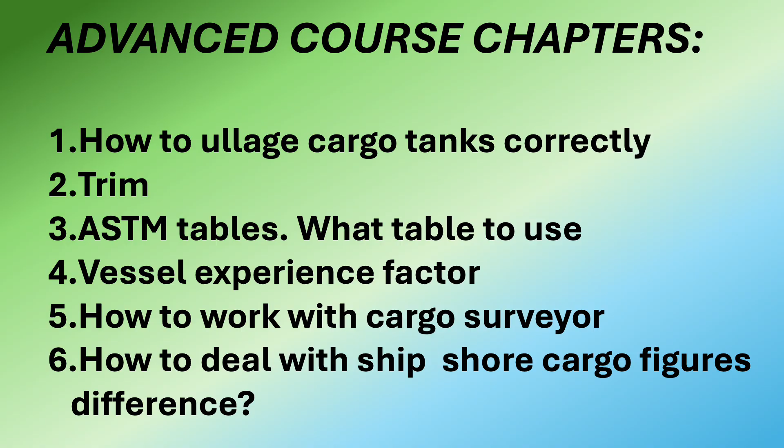Advanced Course Chapters. How to ullage cargo tanks correctly. Trim, ASTM tables, what table to use. Vessel experience factor. How to work with cargo surveyor. How to deal with ship-shore cargo figures difference. Chapter 1. How to ullage tanks correctly.

Before you go on tank deck for ullaging, print cargo tanks ullage report generated by remote tank gauging system. Compare UTI readings with computer-generated report when gauging tanks.

Though remote gauging system readings are not exactly matching UTI readings, by comparison of these two, big errors will be avoided, like recording ullage 2.74 meters instead of 2.47 meters. If a few errors like this happen, then big difference between ship and shore figures will occur.

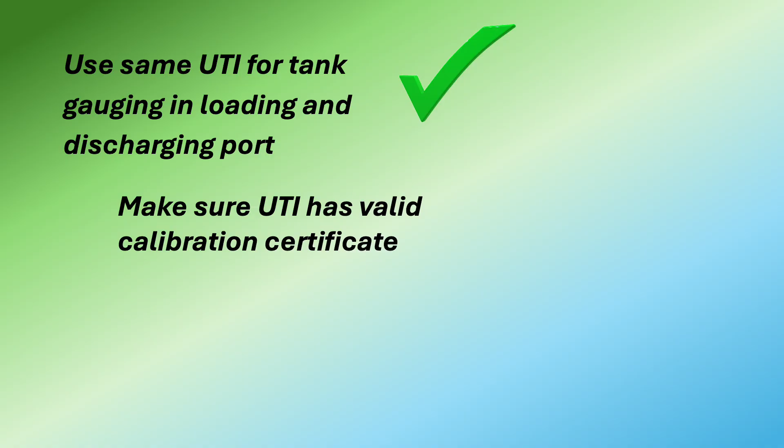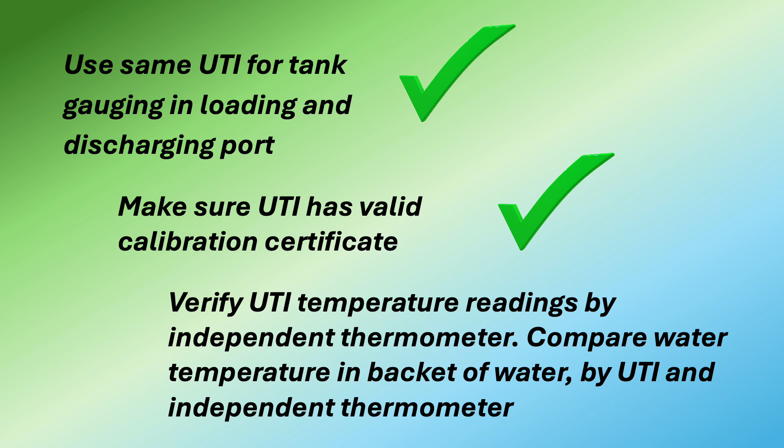Use same UTI for tank gauging in loading and discharging port. Make sure UTI has valid calibration certificate. Verify UTI temperature readings by independent thermometer. Compare water temperature in bucket of water by UTI and independent thermometer. Do not allow any distractions during tank gauging. Errors lead to significant commercial and reputational losses.

Identify gauging ports correctly. Cargo tanks have 2 or 3 sounding ports. These are used to check if cargo is remaining on board after discharging. Do not confuse them with ullage port. Tank deck around ullage port is always painted in black. Height of tank and tank name are always stenciled near ullage port.

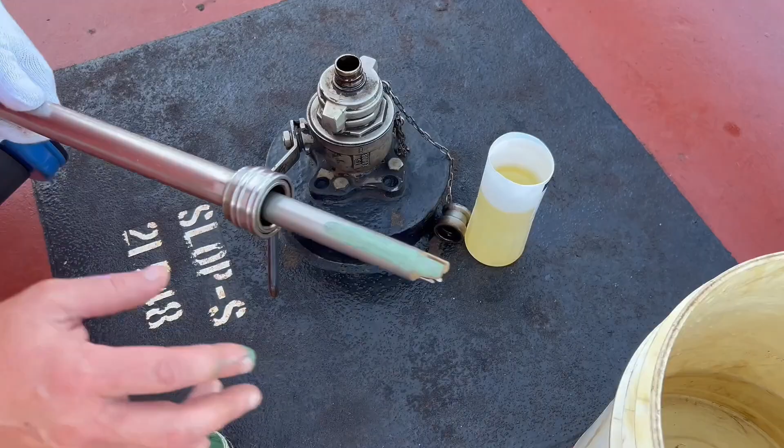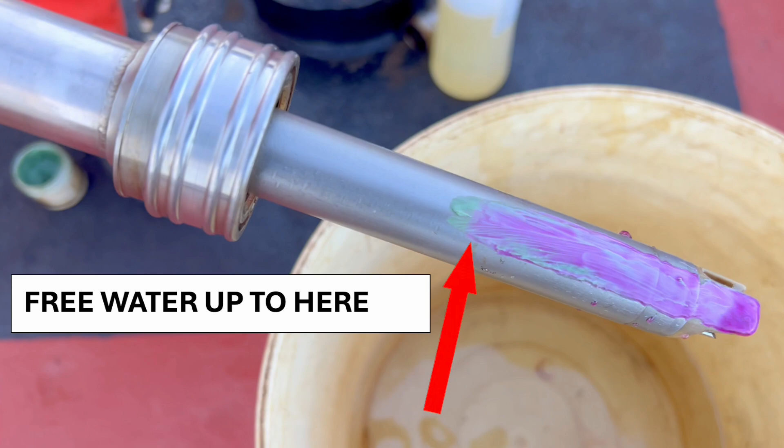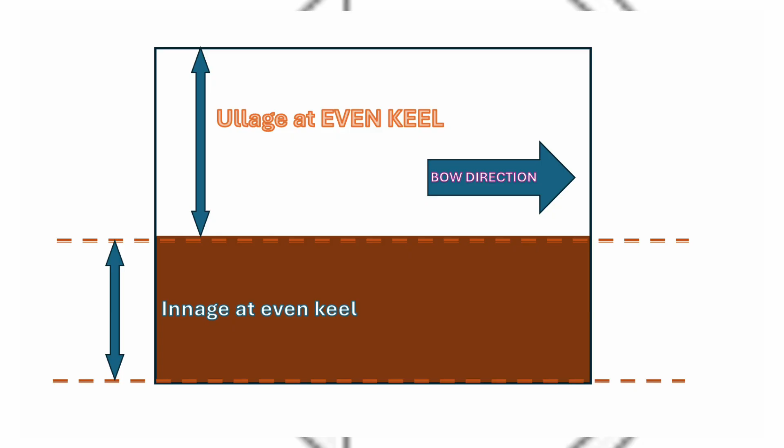Chapter 2. Trim. Tank ullage tables are calculated for vessel at even keel. If vessel is trimmed, level of liquid at ullage port increases. Therefore, when ullaging tanks, vessel must be on even keel or trim corrections must be applied.

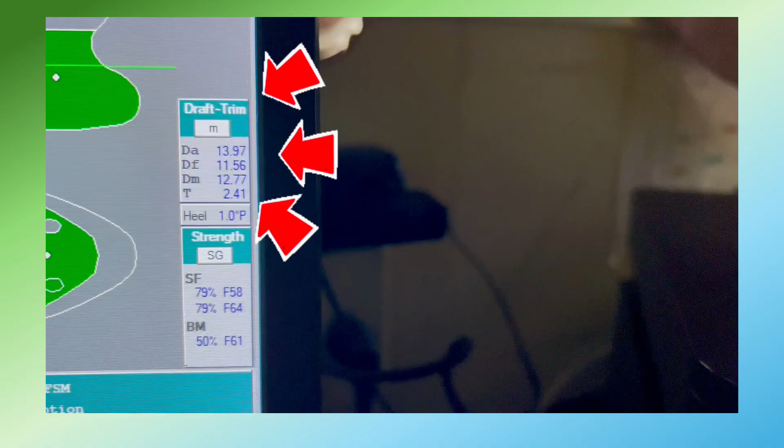Do not use loading program calculated trim for ullage report. This trim is often very inaccurate. Usage of trim calculated by loading program may lead to considerable difference between ship and shore figures. Loading program never properly calculates hull deflection. Therefore, actual drafts are often considerably different from calculated drafts.

Also, longitudinal center of gravity of deadweight constant is never calculated before loading, so the loading program uses approximate numbers from previous voyages. This is another reason for low accuracy of draft calculated by loading computer.

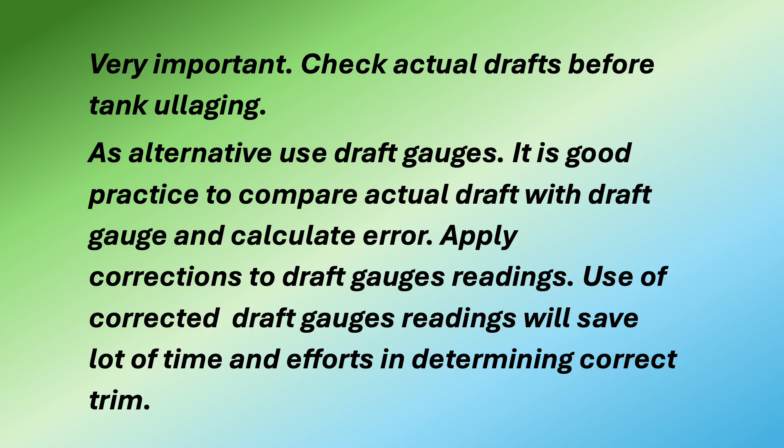Very important. Check actual drafts before tank ullaging. As alternative, use draft gauges. It is good practice to compare actual draft with draft gauge and calculate error. Apply corrections to draft gauge readings. Use of corrected draft gauge readings will save a lot of time and effort in determining correct trim.

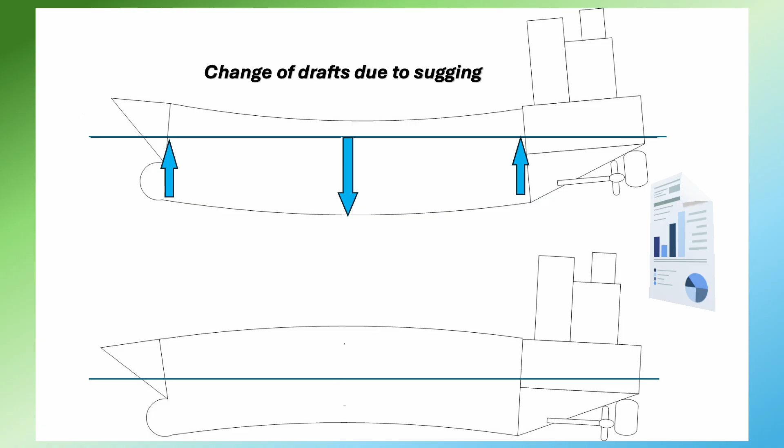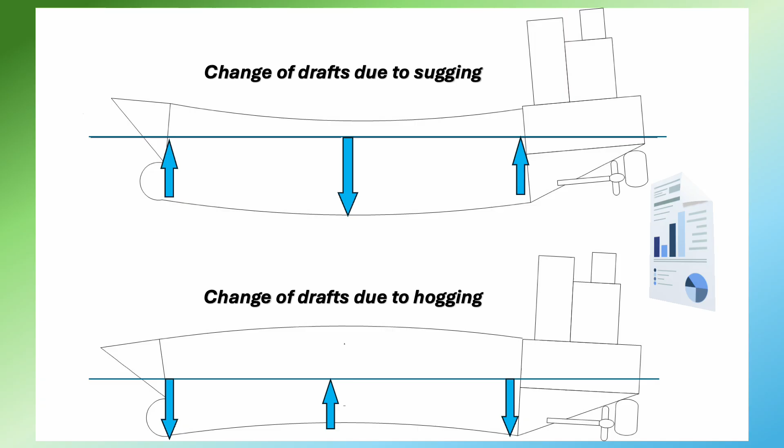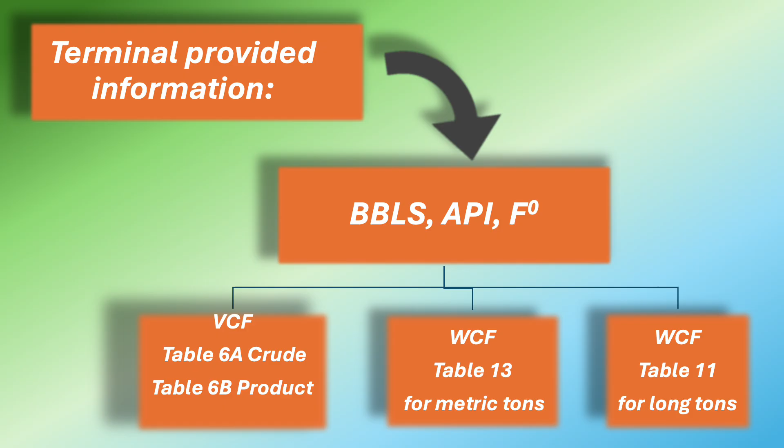It is critically important to use correct trim value. Example: on a Suezmax size tanker, 2 cm of trim by stern will decrease ullage on average by 88 barrels. There are 12 cargo tanks. As a result, 2 cm of trim will cause a 1056 barrels dispute with loading terminal. If trim error is 30 cm, then about 16,000 barrels difference will appear. Use following ASTM tables if loading terminal provides API cargo density.

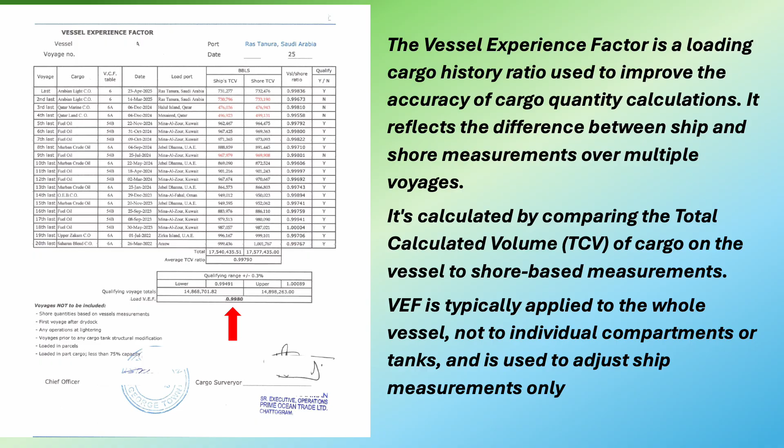The vessel experience factor is a loading cargo history ratio used to improve the accuracy of cargo quantity calculations. It reflects the difference between ship and shore measurements over multiple voyages. It's calculated by comparing the total calculated volume (TCV) of cargo on the vessel to shore-based measurements. VEF is typically applied to the whole vessel, not to individual compartments or tanks, and is used to adjust ship measurements only.

Some voyages must be excluded from VEF calculations: shore figures are not available; first voyage after dry dock; cargo received from another ship during lightering; voyages prior to major structural modifications; cargo was loaded in parcels; loaded less than 75% of ship's capacity. How to apply VEF? Divide total calculated volume by VEF.

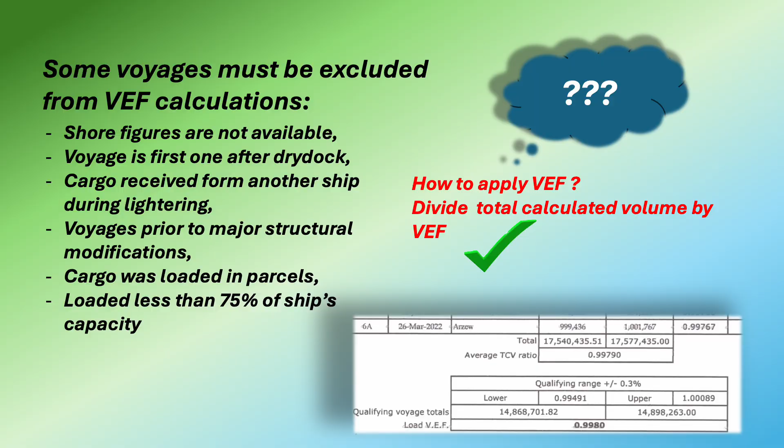Basically, though cargo surveyor is third party, he protects ship, not terminal. Ullage report produced by cargo surveyor is used as third-party conclusive evidence in case of cargo quantity commercial dispute between ship and loading terminal. So, cooperate with cargo surveyor, do not argue. If there is difference between vessel's figures and surveyor figures, it means that somebody made a mistake, and nothing else. Use this situation as an opportunity for double check.

Vessel and surveyor have exactly same ullages, temperature readings and density. Vessel and surveyor use same tank tables, ASTM tables and method of calculations. Consequently, results of calculations must be same, or very little difference occurs due to rounding of numbers. It is easy to find who made mistake, ship or cargo surveyor.

First, check TOV. If there is a difference, check TOV for each tank and find error. If TOV are matching, check GSV. If different, check GSV for each tank. If difference found, check every tank temperature and corresponding VCF, and last, check if WCF is correct. Easy. It takes a few minutes to find error, but it takes much more time for useless arguments due to 10 barrels difference.

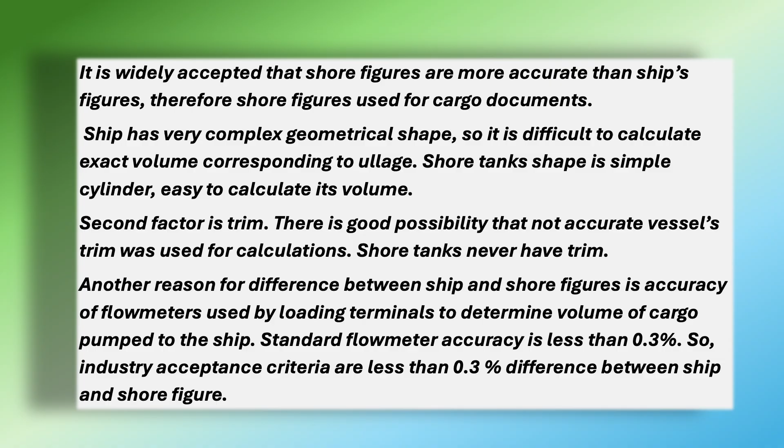What to do if difference is more than 0.3%? Vessel must apply VEF to total calculated volume and compare ship's figures corrected by VEF against shore figures again. If difference is still more than 0.3%, then prepare letter of protest for difference between ship and shore cargo figures.

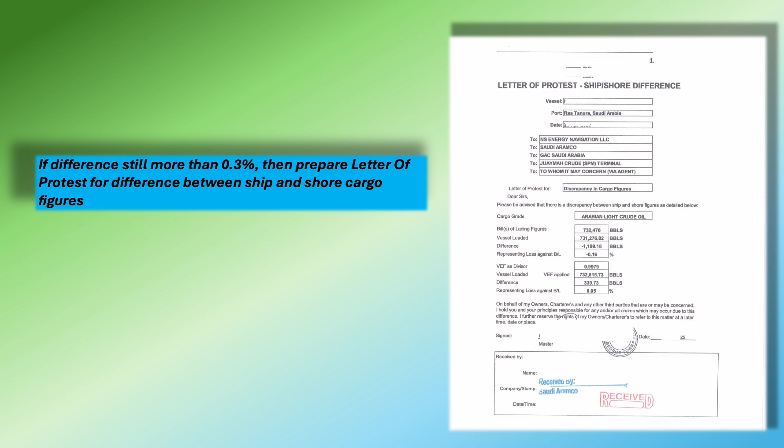And last, inform captain. He will contact vessel's commercial operator and report about issue. Best way to report is to email draft copy of letter of protest for cargo figures difference. When making initial report, signature of any third party on LOP is not required. Commercial operator will provide further instructions to the ship. LOP for cargo figures difference must always be issued, no exemptions, even if difference between ship and shore is only 0.001%.